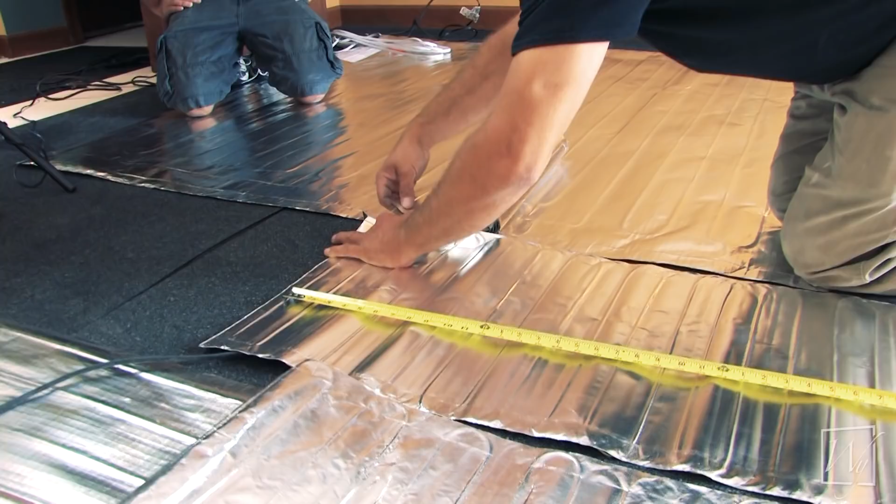Hi, I'm Scott from WarmlyYours, and today we're going to be installing Environ products under an engineered wood floor.

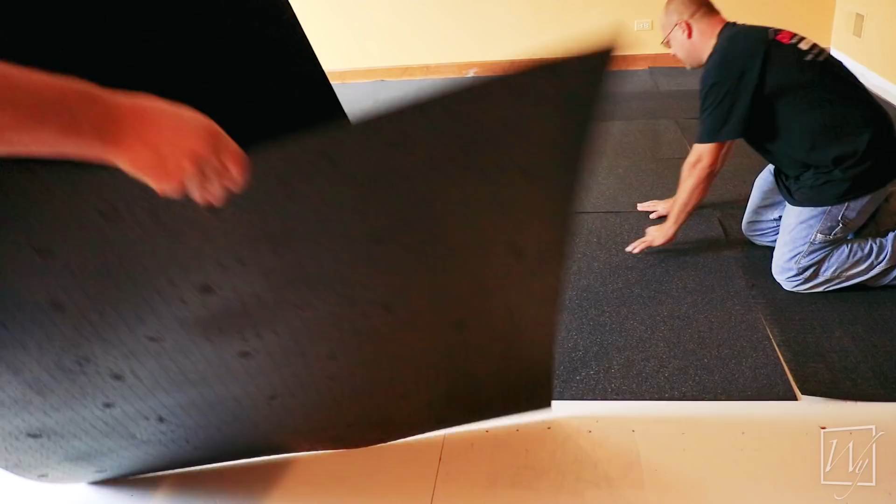So as you look around the room right now, you can see that we've got the product here. We've also installed our Cerazorb, and if you take a look at the Cerazorb, it isn't attached to the floor, it's attached to each other. So what we've done is we've installed it in a staggered pattern. You don't want the seams to be the same all the way across the floor. So we've installed it like brickwork, and it's taped together. So now it will float along with the floating engineered floor.

So we've got that installed already. We've identified where our thermostat location is going to be. It's going to be right over here on the wall. We've got our stuff here from the shipment, and we're going to take a look at what's inside the box. If we take a look inside the box, we've got our installation plan. We also have the instructions that we need to follow when we're installing the product.

And inside here, we have a thermostat. Also inside the box, we have a circuit check that we can use to make sure that the system doesn't get damaged while it's being installed. And we have another part of the order here, and this is our cut and turn product. This is the product we're going to use to fill the smaller spaces inside this room. The idea is that we're going to use the large blanket type product, our Easy Mats, to cover most of the room because it's very easy to install. Then we're going to use this product to do cuts and turns to fill the areas that need to be filled in.

Before any product gets installed, it's always tested with a digital ohmmeter. You never want to install a product that isn't tested first. So you're going to locate the stickers on the product to find out what the correct ohms are, and make sure with your ohmmeter that the product actually matches what it says on the label. So we're going to be testing all these rolls, and if they test good, we're going to go ahead and install them.

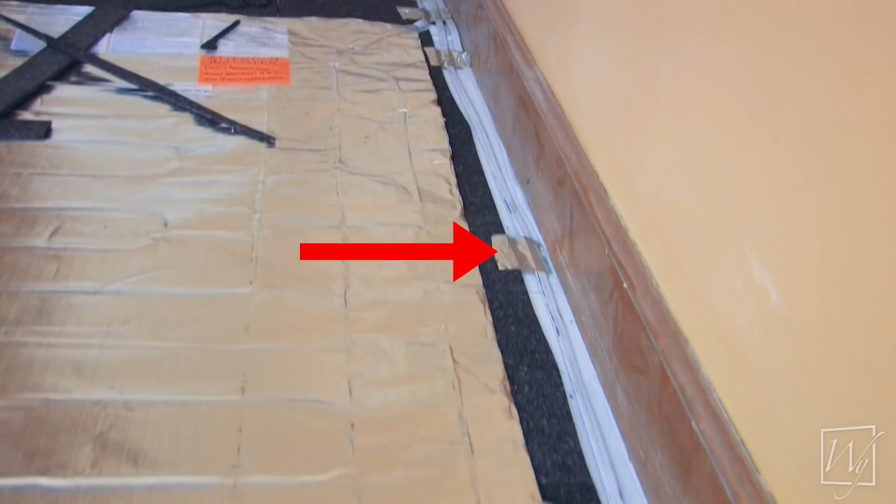Now take note of these products and their cold leads. The cold lead is the part that doesn't heat up. It's the part that runs across the floor and then runs up to the thermostat. But if you notice, there's a recurring theme here. We have red and black, red and black. The only difference between these two products is this product has a braided ground, and this one has a green ground. Red and black means 240 volt, and if you look at this sticker, it says 240 volt.

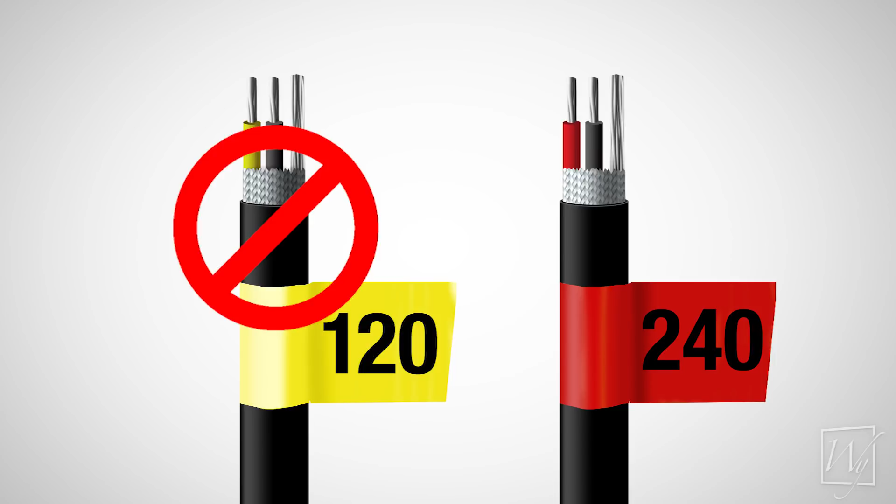You always make sure that all of these products are the same voltage. You never install a 120 volt mat with a regular system that's 240 because it'll damage the 120. So before you even start installing it, please make sure that all of your cold leads are the same color.

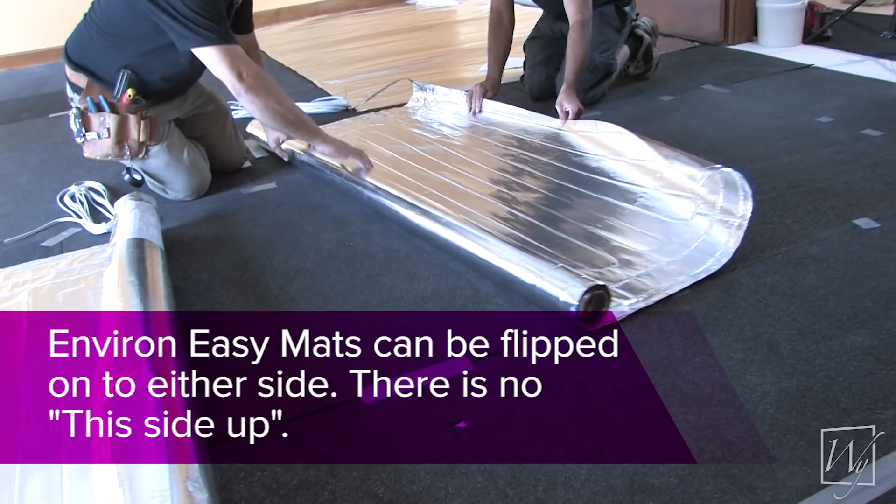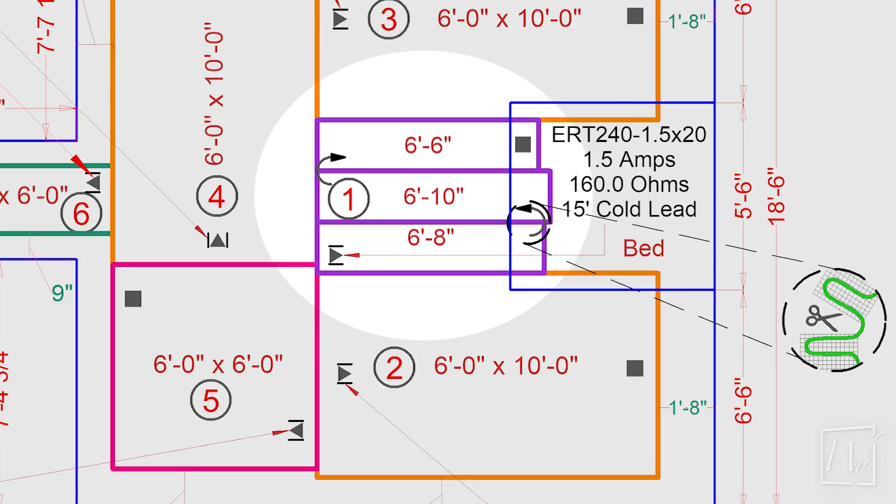Now we took a look at this product, and there are a couple differences between the cut and turn and the larger Easy Mats. The larger product can be flipped either side. It doesn't matter which side is up, because you always want to make it so the cold lead has the shortest distance to the junction box or the thermostat. The thing with this product is it has to be installed with one side up and one side down. So it kind of limits your cuts and turns, and you have to plan for that accordingly. On the installation plan that's sent to you, that is planned for. So the main thing you need to remember when you're installing it is to follow this instruction and keep this side up.

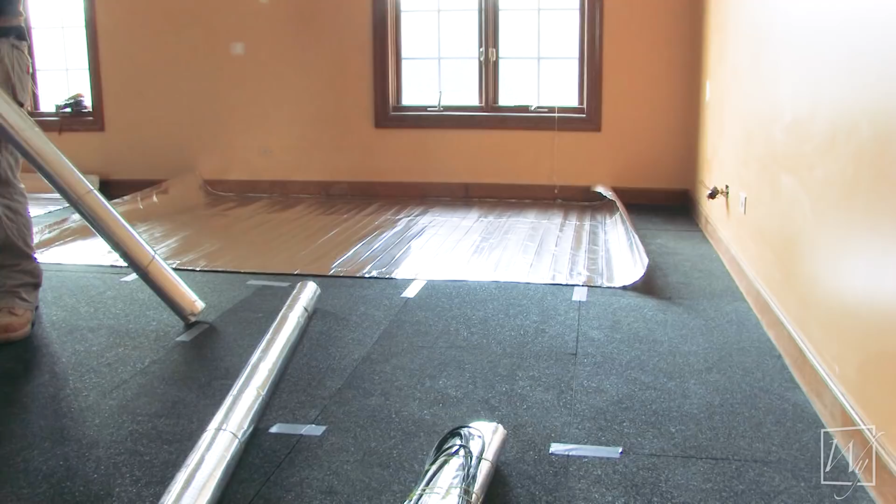Okay, we've got our plan out now, and the crew is starting to lay these out, and you can see these are big mats. You can cover 60 square feet in a matter of about 30 seconds with these. That's what's so great about this product.

Okay, we have the big mats, the Easy Mats, out on the floor. They're just out on the floor now. We're going to place them a little bit later. But what we've done is we've routed the cold leads in the area we want them to go, because we'll have to cut out the Cerazorb to allow the cold leads to flow under the wood without making a teeter-totter type thing. So we're going to get them placed here in a minute.

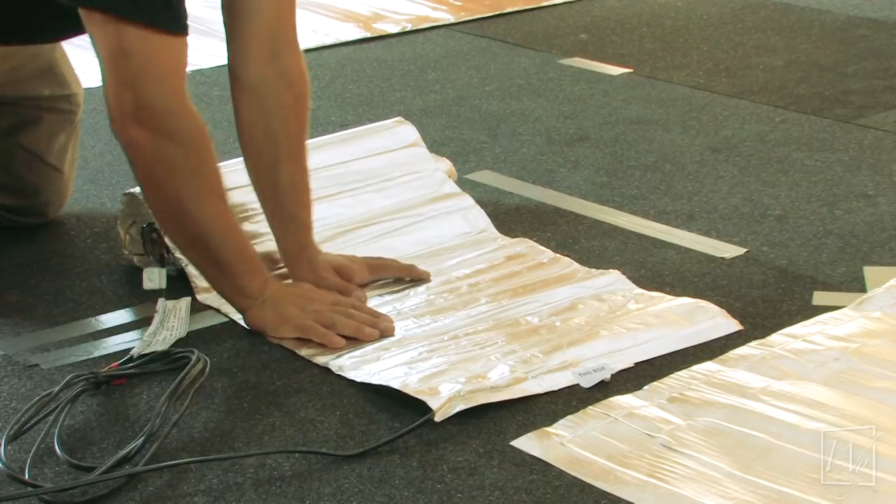But right now we're going to be worrying about our cut and turn product, and we're going to be doing our cuts and turns here. If you look on the drawing, we're not going under the bed.

One thing is, if you're heating a room like this and you know the bed is always going to stay in one place, you don't put heat under the bed because it gets trapped. You want to heat the areas where the people walk. So we're going to be doing our cut and turn here in front of the bed.

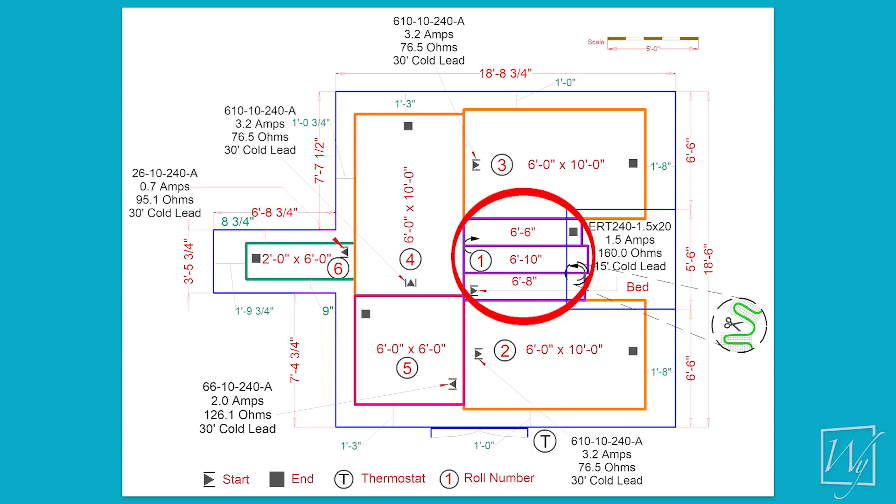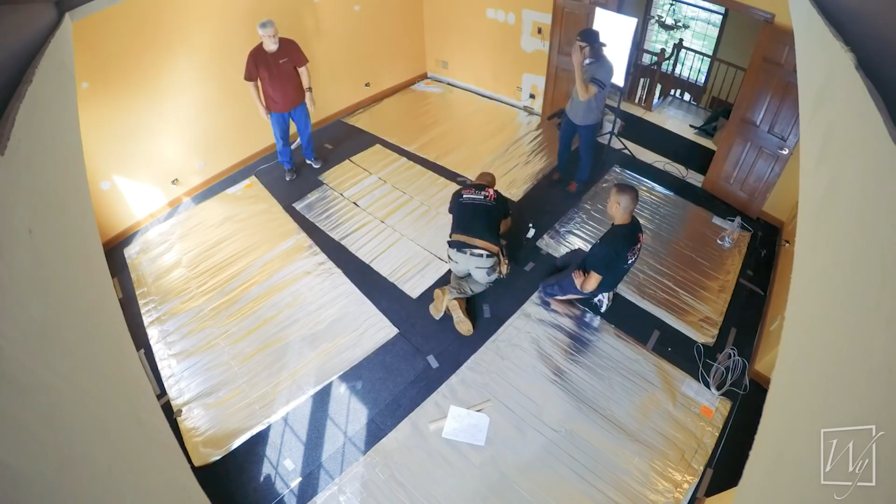Then also, in a little bit, we're going to be moving our mats together to the center of the room, getting them away from the edges of the walls, because no one ever stands against the edge of the wall. They want to walk through a room that's heated contiguously. So we're going to start getting our cuts and turns down. Once we get our cuts and turns down, we're going to start moving the larger mats into the center of the room so we have a nice heated area, not under the bed.

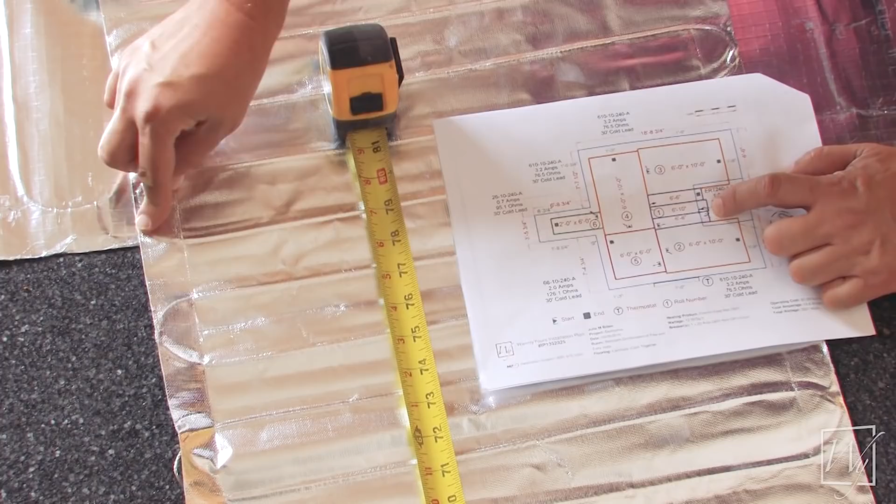All right, if we take a look at the plan, our first cut is 6 foot 8 inches. If you look at the mat, the cable's every 2 inches apart here. So we're going to measure 6 feet, 8 inches, and there is our loop. Here we need to make sure that we're at this side, because if we're here, we can't turn this direction. Our directional turn is going to be this direction, so we're going to cut it here, and this whole roll is going to flip this way and go back the other direction.

Okay, here we can see our loop. We can see our cable underneath. You can see the difference between these two products. This product over here, you never ever cut it at all. You do not touch a blade to this type of mat here.

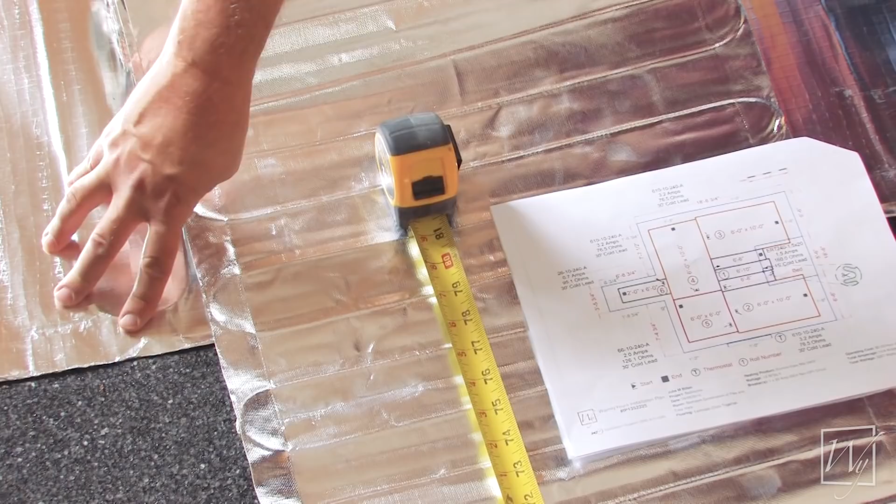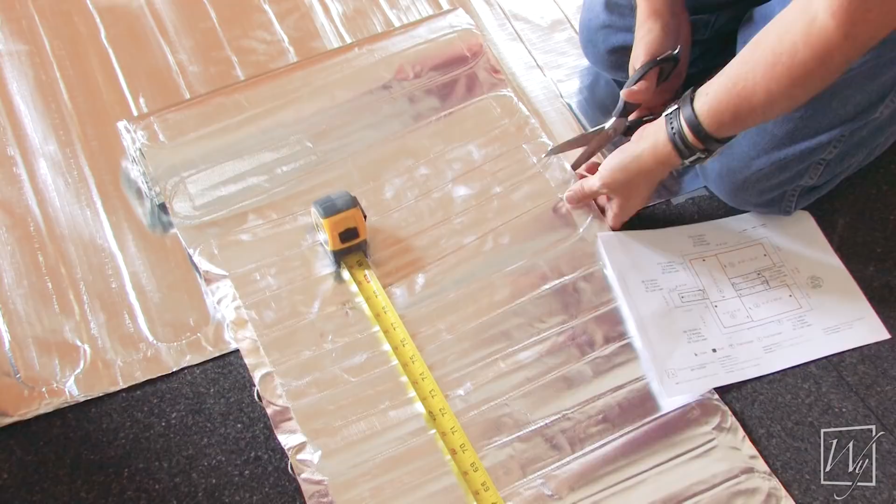For the cut and turn product, you lift the edges and that allows you to get your scissors in there to cut the mesh. You never ever cut the wire on these type of installations. Do not cut this wire, you cut the mesh across, and that will allow you to turn this product over and go the opposite direction. So now that we have our mark at 6 foot 8 inches, we can go ahead and cut this material.

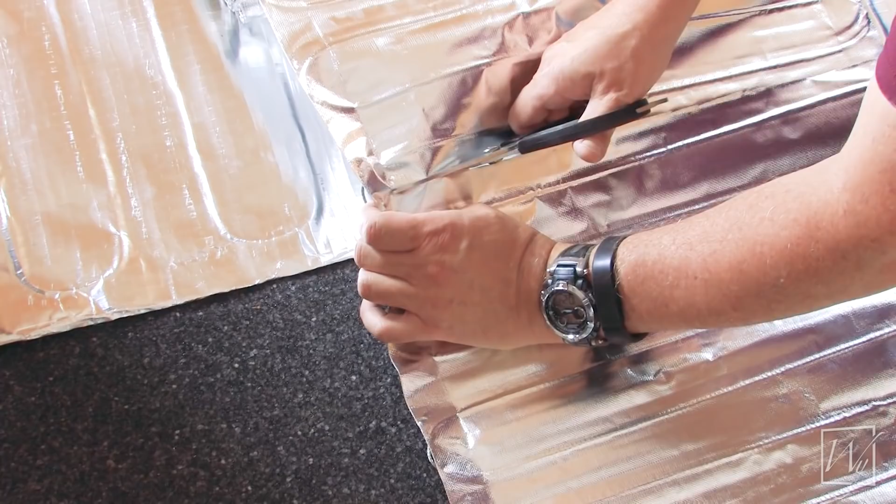Now, if you notice, I'm being very careful because my blade is going to be here. The wire's out of the way. I make my cut, and that allows me to do my turn. Once again, it's not going to be touching the other product.

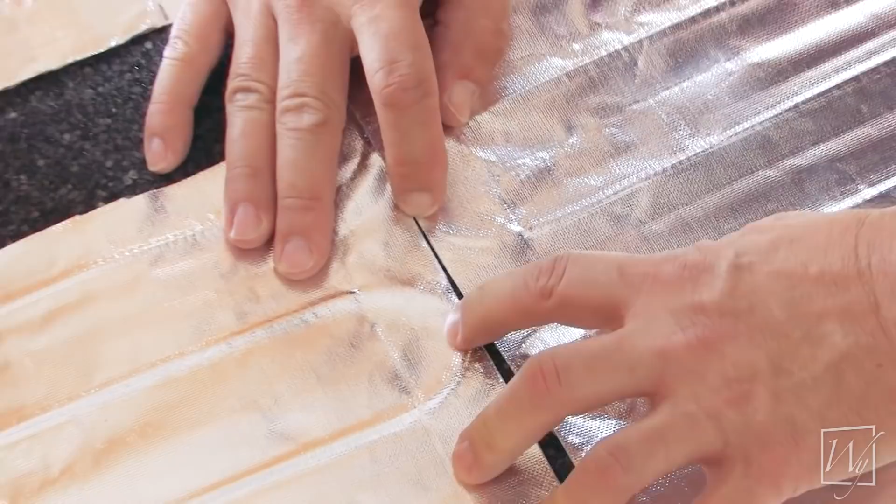Then sometimes it might be good, if you have a real tight space, to stagger the rolls so the tips of the wires don't touch each other. You can see here, here's where the loop is, here's where this loop is. It's better to do this than it is to do that. That's too close. So just move it over like that, and we're ready to do our next turn.

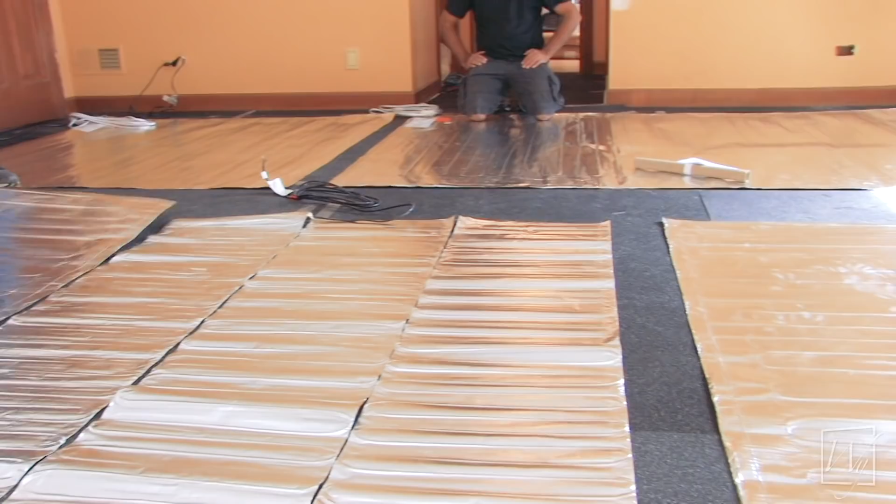Here we can see we've got our mats placed just about where we want them. When we get the final determination of where that is, we'll put tape over them to hold them in place. That way it'll stay in place on the Cerazorb while the flooring is going over the top. So we're going to do a couple things here.

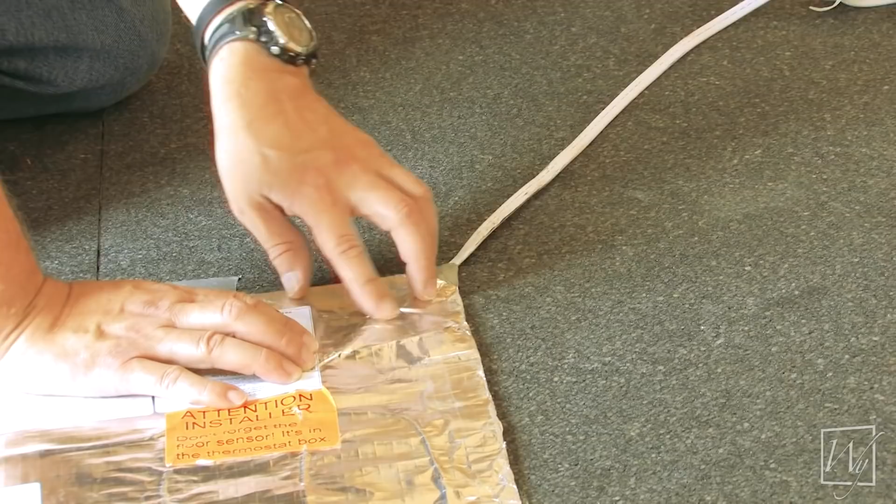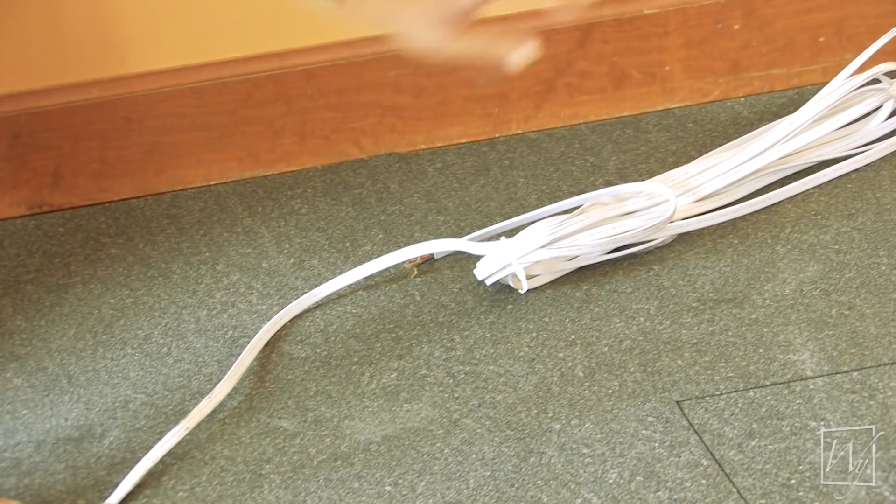We have to take notice of this area here, and this is where the line cord comes in, and this is going to have to be allowed for because otherwise it's going to teeter-totter here. So we're going to need to pull this back, and we're going to need to cut a trench into the Cerazorb to allow this wire to pass through it. We're also going to have to trench this Cerazorb over to the wall to allow it to run along the baseboard, and that's going to eliminate that teeter-tottering over the top.

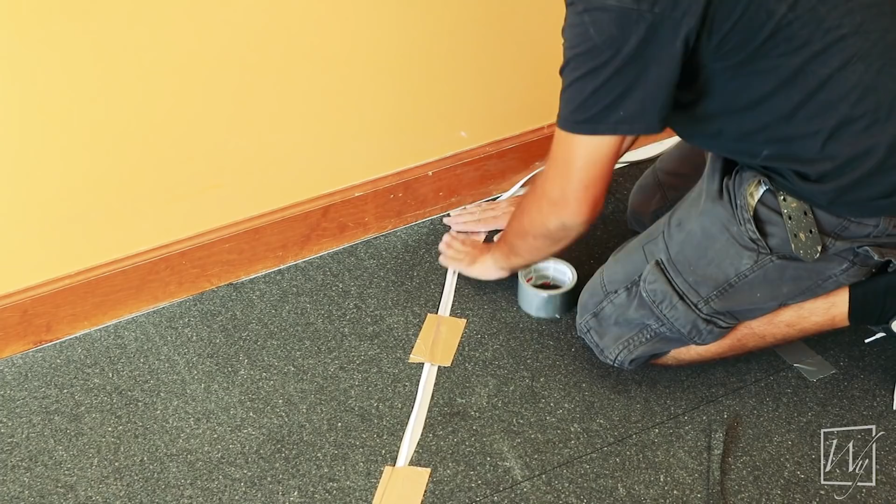So doing a large room like this, you're going to have a lot of mats, and with a lot of mats come a lot of cold leads. Now remember, this wire does not heat up, it's just getting the electricity from the thermostat down to the floor. The one thing about this is you can trim this wire so it is the right length. You can cut this to the right length.

So since we have so many wires, we can't get them all up to the thermostat. So we've installed a junction box here where all 6 of them are going to go, and then we're going to make a termination there and then run them up to the back of the thermostat here.

Now we're going to take our thermostat sensor wire and we're going to run it right in here in between 2 of the heating wires, and you want it about 6 to 8 inches into the mat. That will be the perfect placement for it. You don't need to run it all the way out into the middle of the floor. So we're just going to run it through here. We're going to put it underneath and we'll be all set with that.

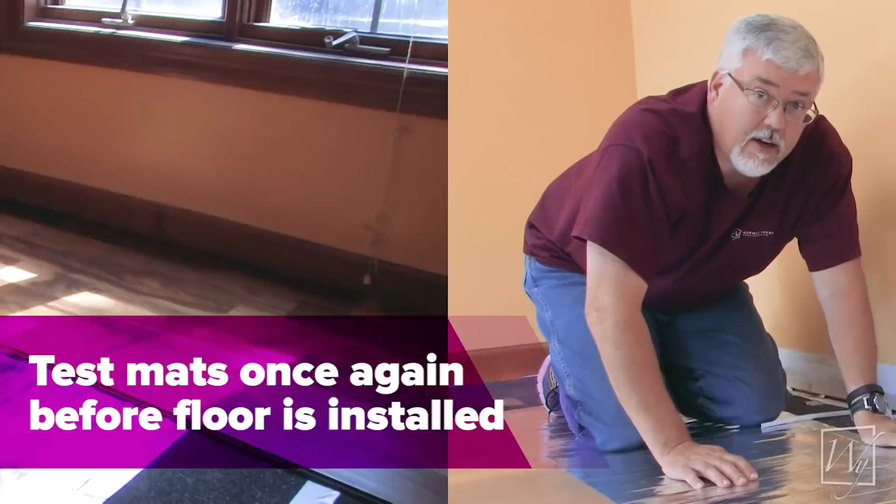All right, the floor is installed. The baseboard is put down. They'll probably come in and do some shoe trim around the perimeter of the room. But now we have all this extra cold lead that we need to get rid of because we're going to be making our connection of all the mats together down in the junction box at the lower part of the wall.

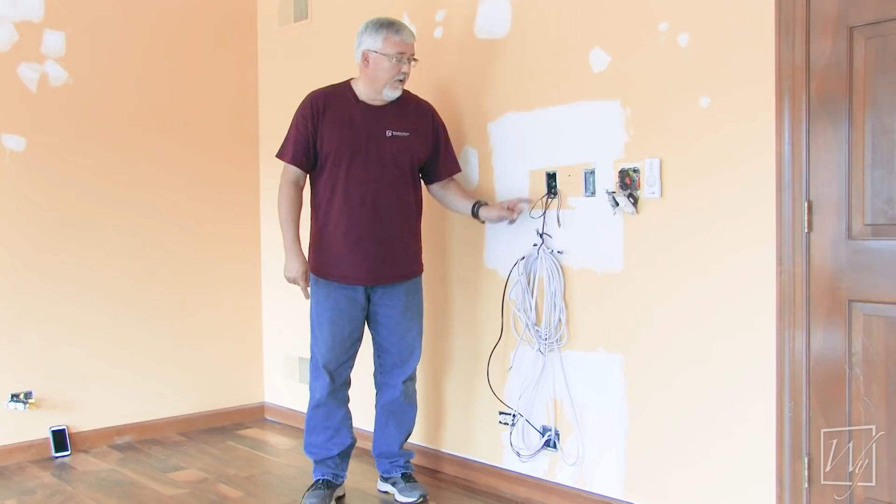And then we're going to run power from the thermostat here down to that junction box. So instead of 6 wires coming up to this, there's going to be 1 pair of wires going down to meet the 6 mats that are joining in the junction box. So now what we're doing is we're cutting all the cold lead lengths to comply with code. Your local code will say how much cable needs to be sticking out of the box to make your connections. So whatever that distance is, you want to make sure you follow your local code and do it correctly.

And then once we get the lengths correct, we're going to start stripping it back so we can get the red, the black, and the ground wires liberated, so we can start tying all the reds together, all the blacks together, and then all the grounds together. All the grounds are going to get terminated in the box, because in this particular system, the boxes all provide a good ground because there's pipe throughout the entire house. We're going to ground it into that box, and then we're going to tie all the reds and all the blacks to the wires coming down from the thermostat.

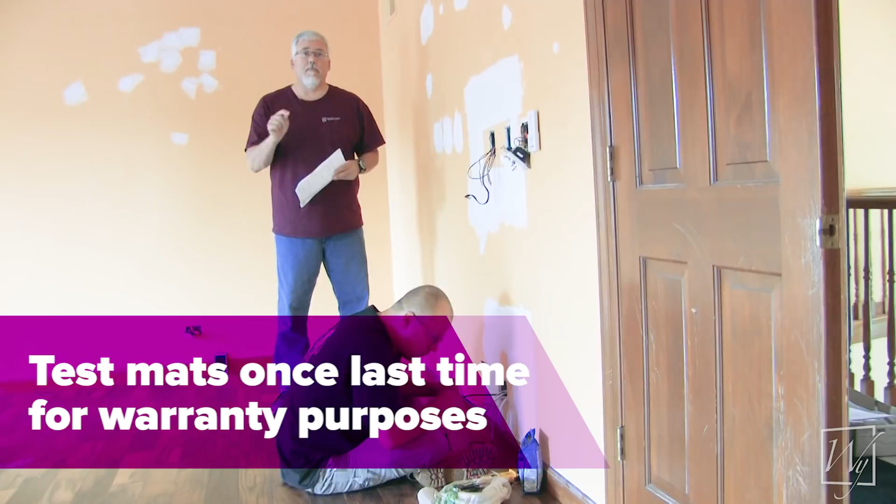And now we're going to test every one of the mats to make sure that it has the same reading as it did when we put it in. We're going to write the numbers down, put it on the warranty card, and hand that warranty card to the homeowner so they have record of what the ohms readings are. So if they ever have a problem with the floor, they can just give us a call and say, hey, I've got these ohms and here's what they are now. So make sure you always test them before you put them all together to make sure they're all good and they match the numbers that were on them when you got them.

As we talked about before, we're going to be taking all the red wires from all the mats and putting them together, and all the black wires from all the mats and putting them together. And that's going to be connected then with the wire going up to the thermostat. Now, you are going to connect those wires in the way that is permissible by your local code. Your code may allow twist connectors, or wire nuts, as some people call them, and your local code may require a barrier strip, a terminal strip of some sort, to tie all those together. So just make sure you do it according to code. Once we have these all tied together, all we have to worry about are the grounds, and all the grounds are going to be tied together and grounded to the box that's in the wall.

Okay, now we've got our connections all made and it's back inside the box. This box is actually a 4x4x4 box. It's a square box. Gives us a lot of room to put all those wires. All that's left now is to put a cover over that, and then we'll talk about installing the thermostat.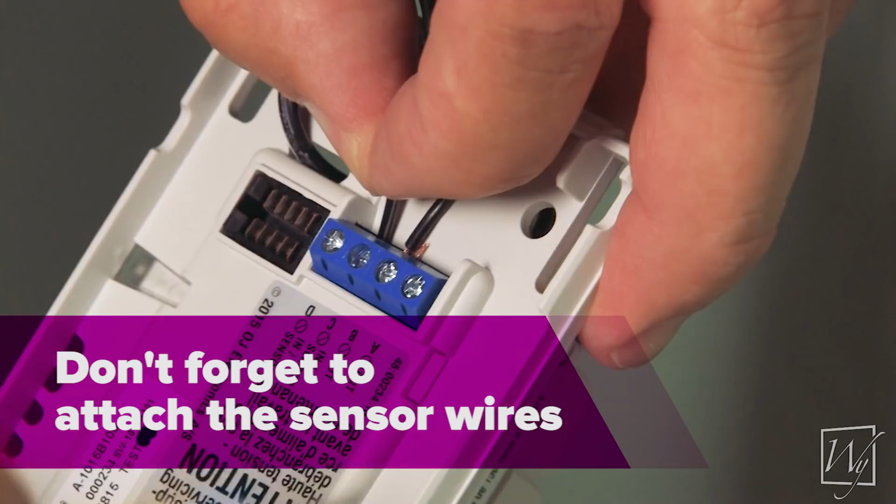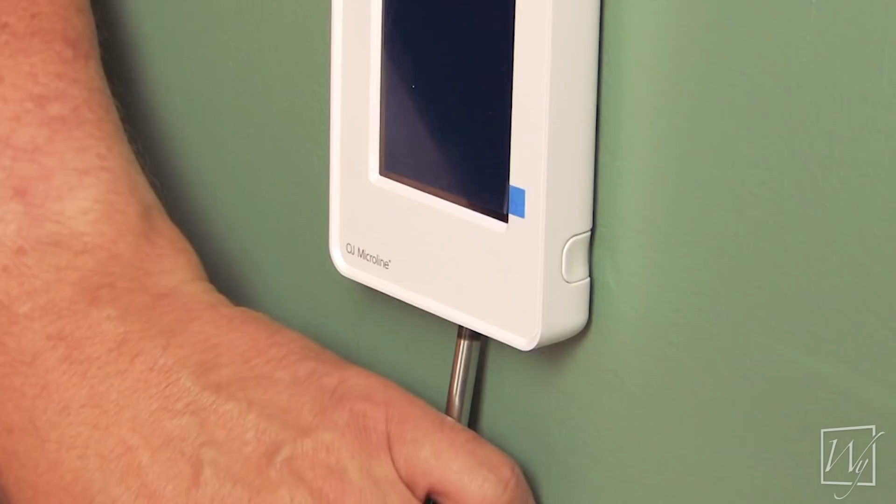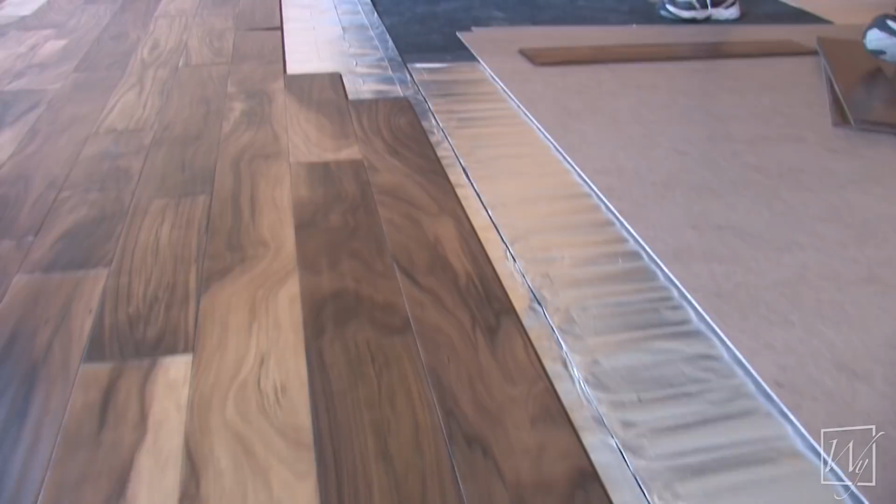Well, you can take a look around this room and see that it looks fantastic. And the best addition to this room is actually underfloor heat. So this room will always be nice and toasty in the winter time. We put our Environ product under this click-together hardwood floor. Feels great. We have the thermostat installed. It's working like a charm.